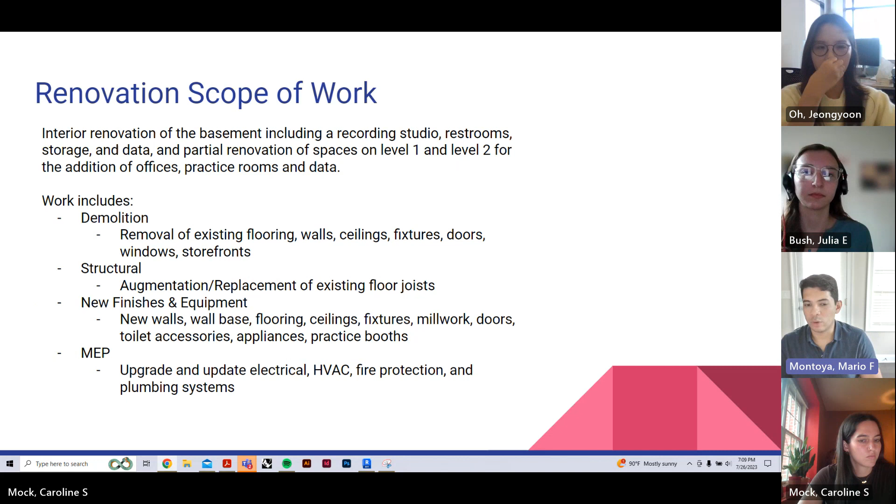Fire protection also has to be updated to abide with existing code, and new plumbing systems will be installed for new appliances and for the renovation of the restrooms.

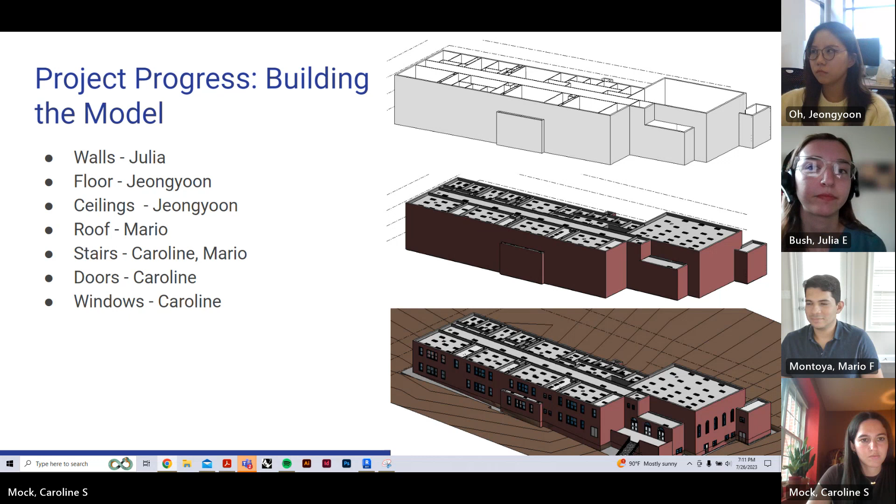For our important assumptions, first I assumed the floor-to-floor height was 12 feet based on the drawings mentioning the ceiling was 10 feet, with 10 feet clearance in some rooms. So I assumed the floor-to-floor height would be about 12 feet.

For the walls, I used brick-on-metal studs for the exterior walls. The exterior walls weren't really included in the renovations because they only modified indoor spaces, but it's a pretty standard assumption for a brick-on-metal stud facade.

For the interior walls, I used 4 7/8 inch partition walls because they had the same layers included in the drawings. They're pretty unclear and hard to read, and a lot of things aren't dimensioned, but it did have gypsum, stud, and gypsum layers. So the partition walls seem pretty close to what was in the plans.

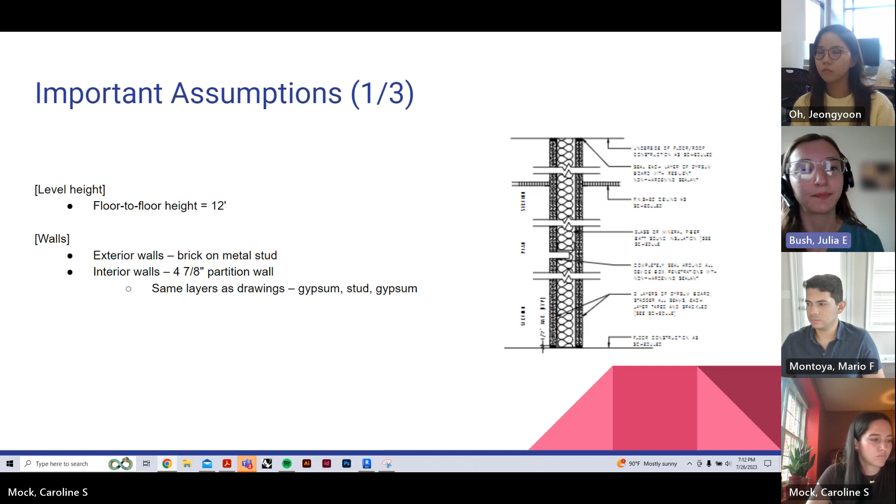Let me explain several assumptions for the floors and ceiling for the Couch building. For the floors, I considered a 6-inch slab on grade constructed with cast-in-place concrete.

The specific finishes were determined based on the finish legend provided in the drawing, as shown in the table on this slide. So I applied various finishes for the floors, such as carpet tile, ceramic tile, vinyl tile, and engineered wood based on the corresponding details in the drawings.

There were some instances where the finish tile wasn't specified, so in such cases I made an assumption and applied vinyl tile for the unspecified floors.

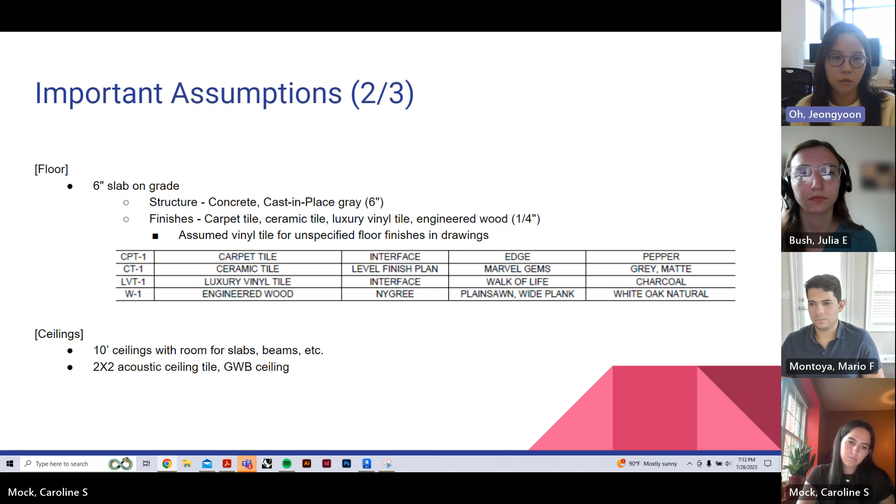For the ceiling, a height of 10 feet was determined, taking into account the necessary space for the slab, beams, and other elements. The majority of the ceilings were constructed using new 2x2 acoustic ceiling tiles and gypsum board.

Now I'll talk a little bit about the assumptions we made for the roof. We looked on Google Earth and based on views from the street, we believe it is a flat roof with a parapet and this decorative fascia running along the top of the building. So that's how we modeled it.

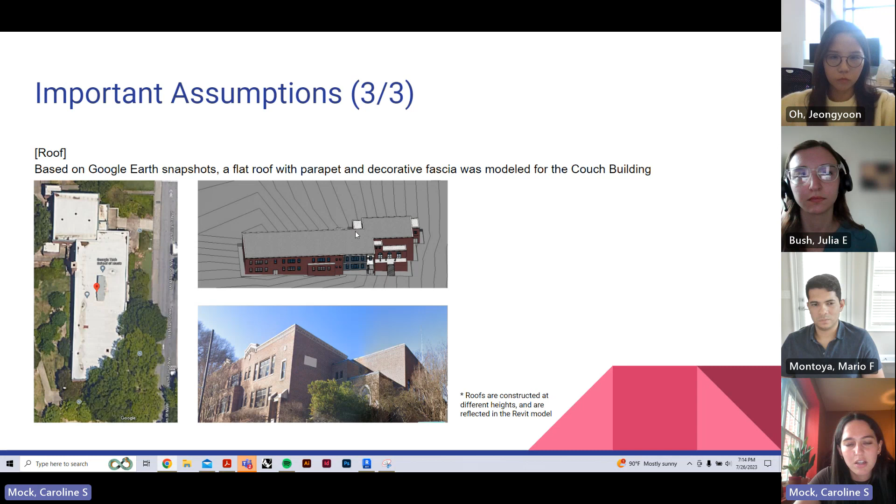You can kind of see here in this top middle drawing from our model where the parapet dips into the roof.

For the doors, based on the drawing set, we assumed a 3-foot by 7-foot door that was 1 3/4 inch thick with a painted wood finish. The other door type in the set was a 3 by 7-foot door that was 2.5 inches thick, metal with a painted finish.

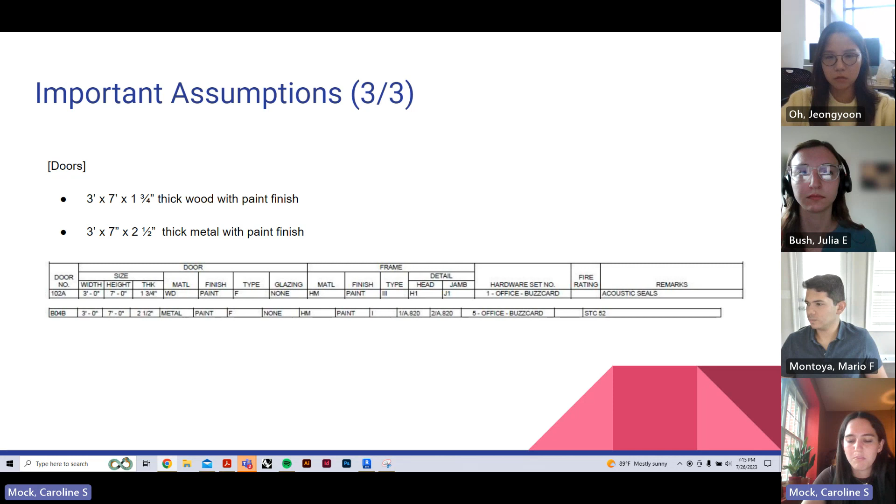For windows, all the windows in the building except for the basement level were to remain original. Based on our site visits, those were double hung metal windows with paint. In the basement, you can see in this detail they have clear laminated safety glass, for creating a better sound system in the basement recording studio.

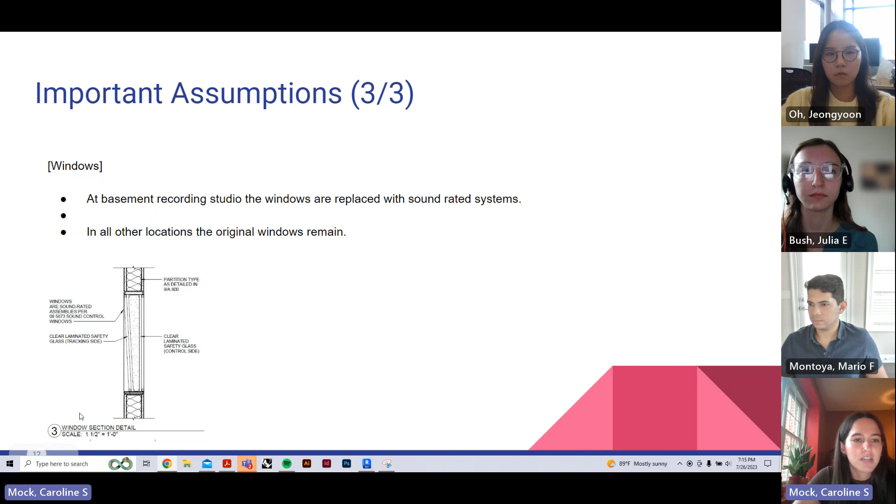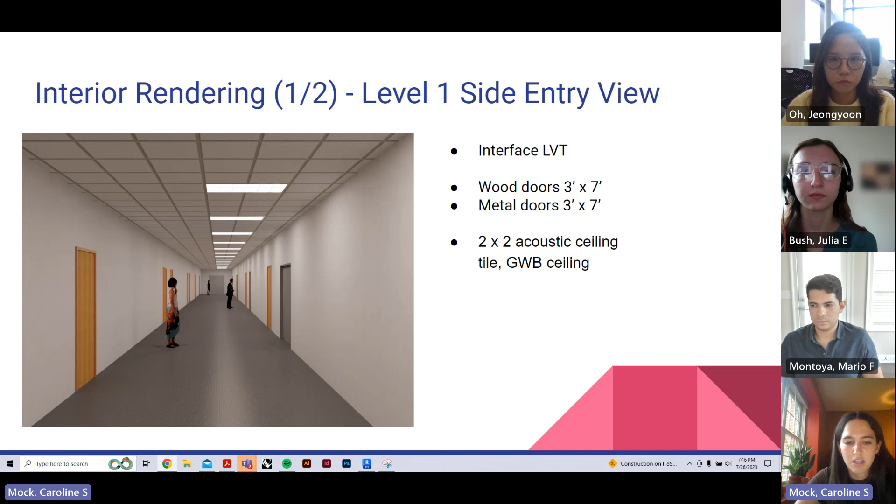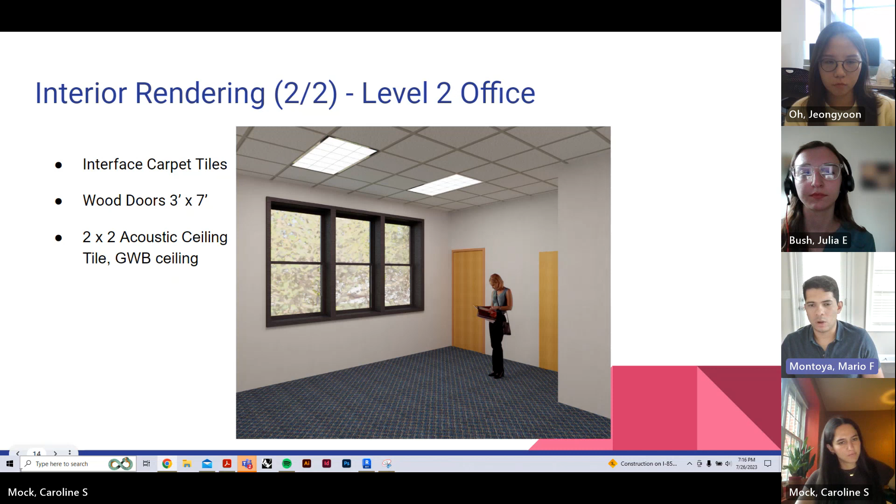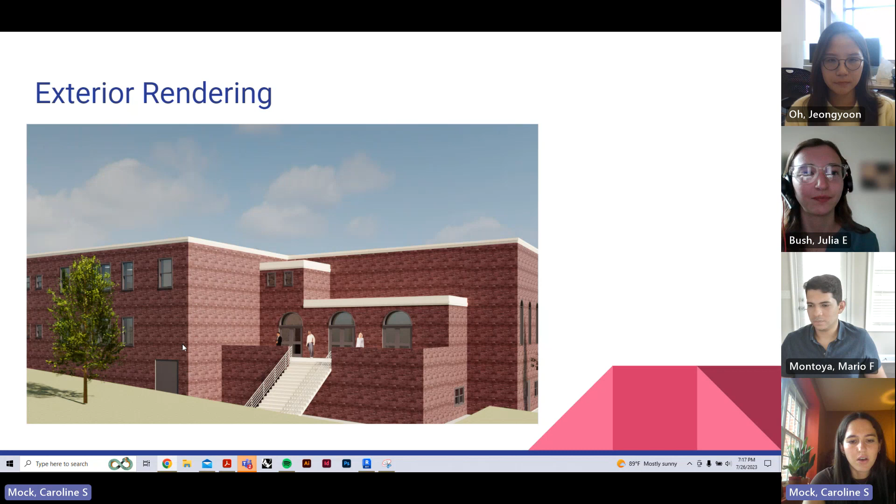And that wraps up the PowerPoint presentation portion of our presentation. Caroline, I don't know if you want to share our 3D model for a little bit. Yeah, I'll pull the model up and do a little fly through.

Let's put it in realistic.

So we did end up adding topography just because the building has a really interesting grade. It's up about, I would say, around 2 meters off of the street. And there's a very interesting system with the stairs.

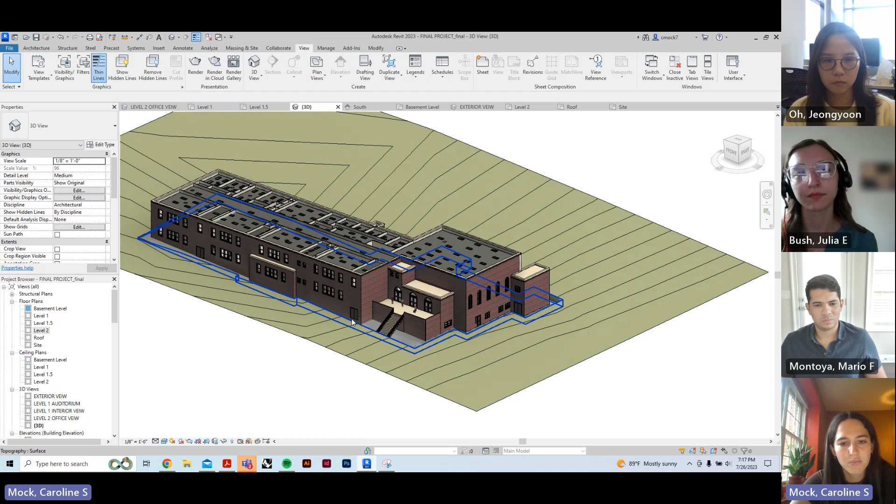So there's sort of a half level. If I click on this wall here, you can see that the entry door kind of takes you into a stair off of this half level. But yeah, as you can see, we need to turn my roof on.

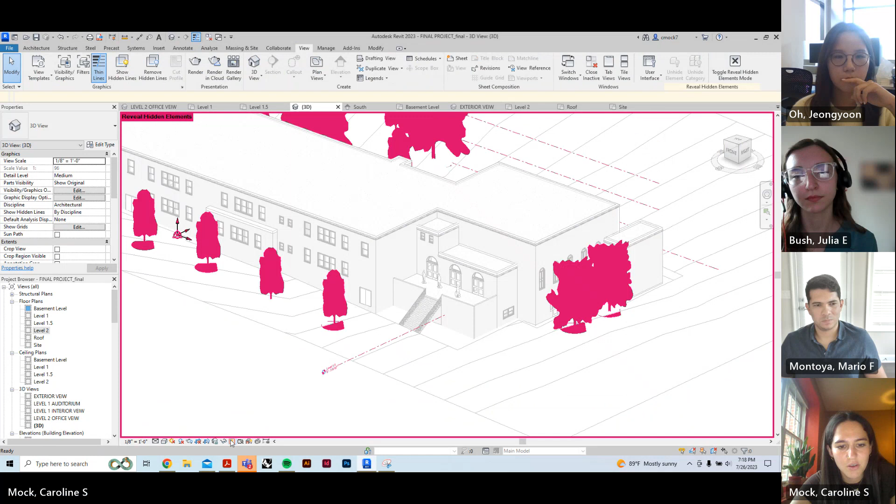Got some plantings, and a full model for you to take a look at.

All right. Should that wrap us up? Yes. All right. Well, thank you guys.